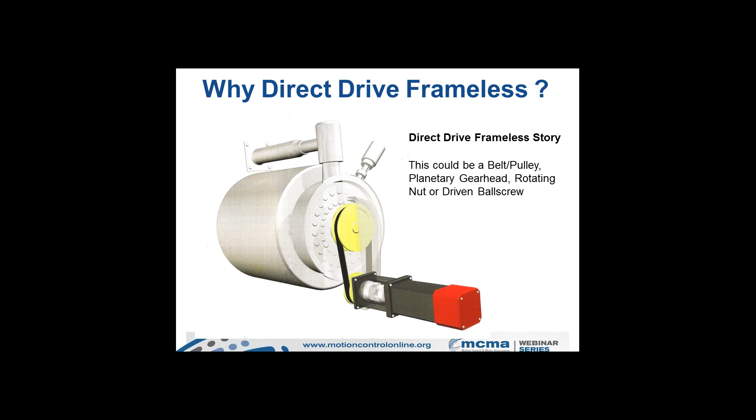Basically, the direct drive frameless motor story can be summarized in two simple slides. We have regular servo applications that use either belt pulleys, planetary gear heads, or rotating nut and driven ball screw systems, all driven by servo motors that in some manner link to a mechanism, a machine, some kind of automation. Very simply put, what we're trying to do is replace the electromechanical systems with as few components as possible, using a direct drive capability, as you can see in this oversimplified view.

Let's take a look at a few simple points on why go to direct drive, why pursue frameless motor technology. There's a need to generate clean mechanical assemblies with lower and lower parts count, and reduction of assembly time. We also want to make sure that by taking advantage of frameless motors, we get significant improvements in servo performance, due to reducing lost motion, backlash, and the losses in motion control associated with gear trains and mechanical systems. We can see system accuracies increase up to 50 times.

By having higher servo performance and machine control bandwidth, we can push the bounds of motor architecture and technology. Historically, there's been a need to worry about applying a servo motor due to lost motion and inertia mismatch—that's the load inertia reflected back through the motor inertia. We've always wanted a rule of thumb of 5 or 10 to 1 motor-to-load inertia matching, in order to ensure good, stable servo performance.

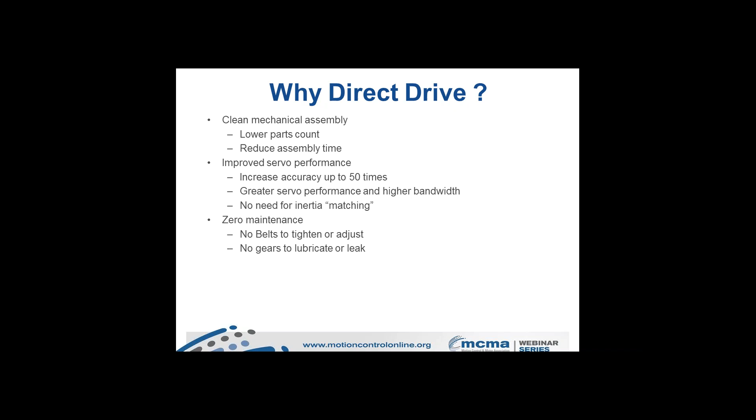By going with direct drive technology and reducing or eliminating all lost motion in the system, and having an extremely stiff system, this is where we get the increase in servo performance. Also, you'll have very little maintenance, typically with no belts, no gearing, no lubrication, no leakage—these are systems that make good, solid sense for going direct drive. Because of the lack of mechanical transmissions and additional parts, there is a significant reduction in machine downtime and improvement there as well.

Another benefit of going with a frameless motor architecture is that we often have the ability to have a through bore through the center of the shaft of the motor. This lets us bring in functionality like process air, dealing with pneumatic systems coming through.

Even hydraulic systems, oftentimes in applications, we see people putting large bore assemblies for slip rings and even microwave antenna systems through the center, often in military and aerospace applications.

The other performance improvement is that we can generally run substantially more quiet. We've seen improvements in noise reduction by up to 20 dBA scale, by getting away from having those typically high-powered, high-performance servos screaming at 4,000 to 8,000 RPM, driving through gear trains that make a lot of extraneous noise, and getting these systems quiet.

In the European model of machine building over the past 15 or 20 years, they were very quick to adapt and develop machines that had frameless motor architectures. In the United States, we were somewhat slower in developing this because we had very large floor spaces on the manufacturing centers, and we weren't as constrained by having physically large machines.

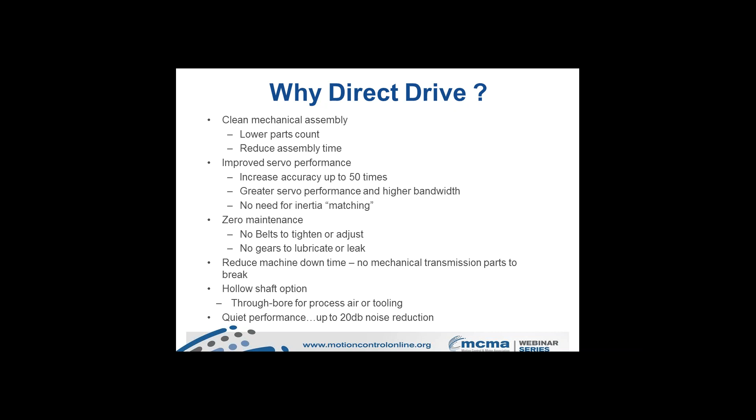The use of lean manufacturing processes in most of modern American manufacturing environments has caused the need to have machines physically get smaller. And as a result, the direct drive nature of motors and designs has been significantly improved.

I want to spend a minute on one particular style of direct drive application that is basically taking a housed, simple, directly driven, frameless style motor onto a 4-foot diameter steel load wheel. This particular load wheel weighed 250 pounds, and there are 96 steel elements near the edge of the radius of this system. This would have been for an application where there's a need to very specifically put a needle into a process point near the radius here.

So we've got a move of 3.75 degrees per peg, and you've got a 15 pound-feet second squared total inertia. The inertia of the load to the motor in this case was over 1,500 to 1 load inertia. You'll notice that the motor has a continuous performance of over 250 foot-pounds.

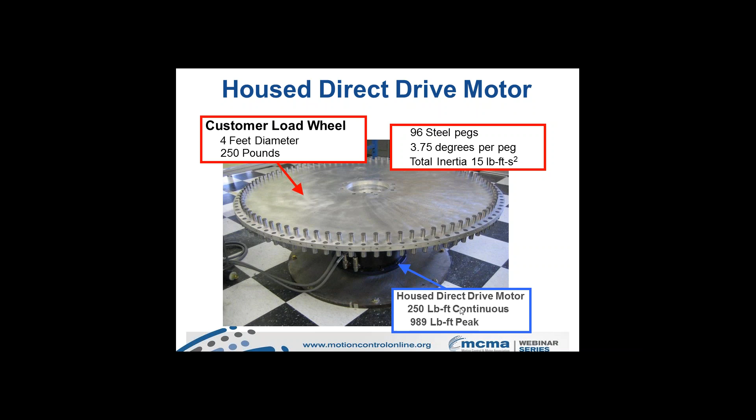Frameless motors are sized anywhere from 1 to 1.5 inches in diameter, all the way up to standard housing systems up to 34 inches in diameter, with continuous and peak load points measured from ounce inches up to measured in tens of thousands of foot-pounds.

If I take a look at the move profile that this particular application was able to accomplish, the nesting of the load points had to be accomplished very quickly, and especially with a high load inertia, trying to get down to a settled move time less than 100 milliseconds.

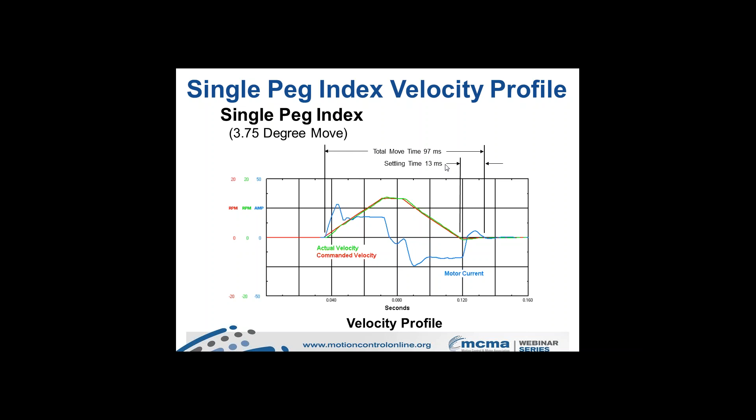So you'll notice here, for example, that we've got a 100 millisecond move time, and that coupled with an application that is driving 100 milliseconds of actual performance, that's 300 cycles per minute for the application for this kind of move.

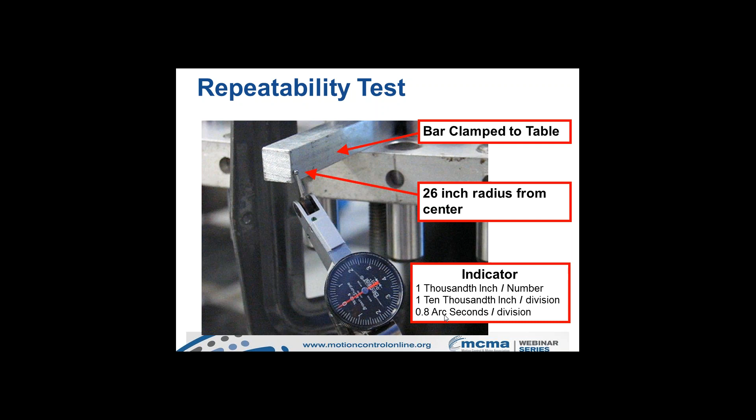I'm going to show a little bit of information here on a repeatability test that we did. I'm going to show a bar clamped to that rotary table at a point 26 inches in the radius from the center. I'm going to put a dial indicator, and the numerals here are going to indicate a thousandth of an inch, and each division will be a 10,000th. That 10,000th of an inch is representative of 8/10 of an arc second per division.

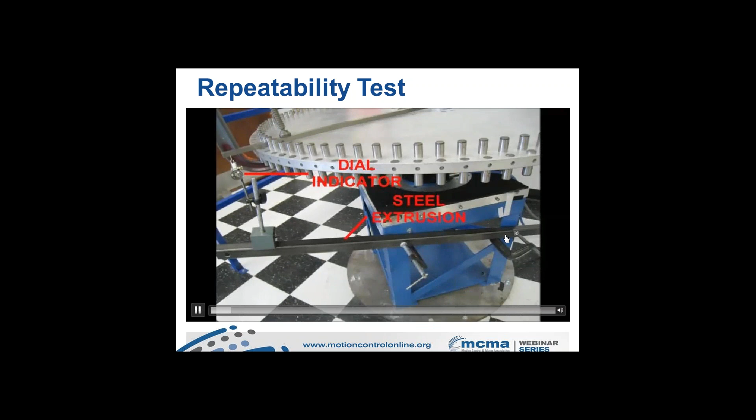The dial indicator you see here on the system is mounted to a steel extrusion bar, and we'll then go through a process of zeroing it out. You'll notice here that it's 1, 2, and 3 thousandths of an inch by the large numeric indicators. Each division is 1 ten-thousandth of an inch.

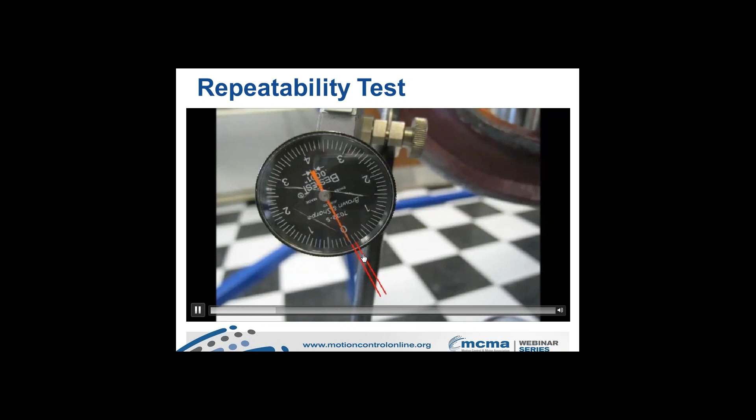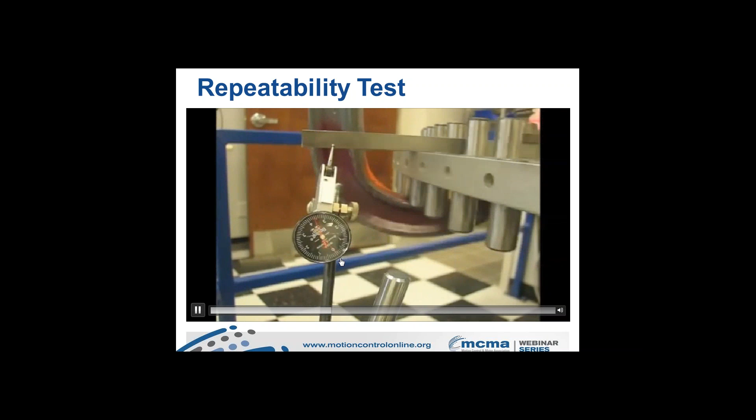Let's take a look now as we command the motor to draw back and forth to move away from the zero position. Moving away from the zero position clearly takes it off the dial indicator and will return. Now we're going to show the variance of well less than 1/10,000th of an inch, or better than 8/10 of an arc second of repeatability. Keep in mind this is done at a radius of 26 inches from the center.

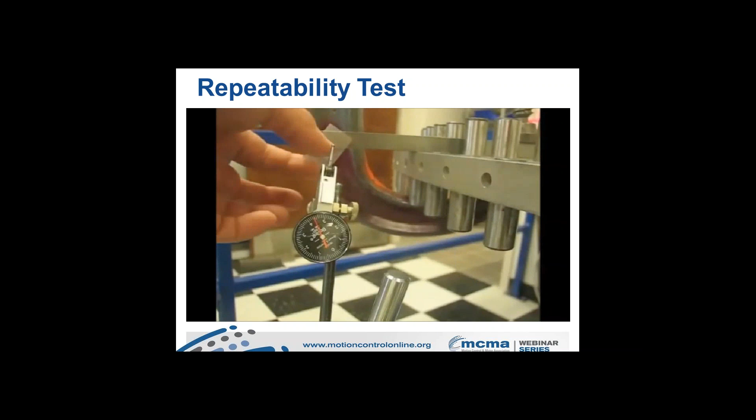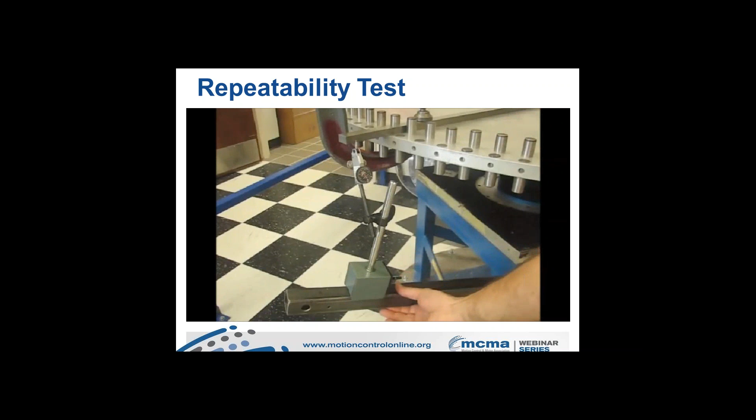We're going to move the motor away for a moment and put a piece of Scotch tape on it. As we bring it back into position, you'll see that the tape's thickness is on the order of 1.6 to 1.7 thousandths of an inch. As we back off and remove the tape, it returns to that same zero location. If we push on the load wheel, we only see about 1 thousandth of deflection, but if we push on the extrusion, we see as much as 3 thousandths. This shows the servo loop has substantially higher stiffness than the steel extrusion itself.

This kind of system has extremely high bandwidth and extremely high servo performance. Right now we're commanding moves of 1/10,000th of an inch, and when a hand rests on the load wheel, you can't even feel the physical movement of the system. This shows the capability of high performance, direct drive systems, and typifies the extreme positioning capability within these kinds of systems.

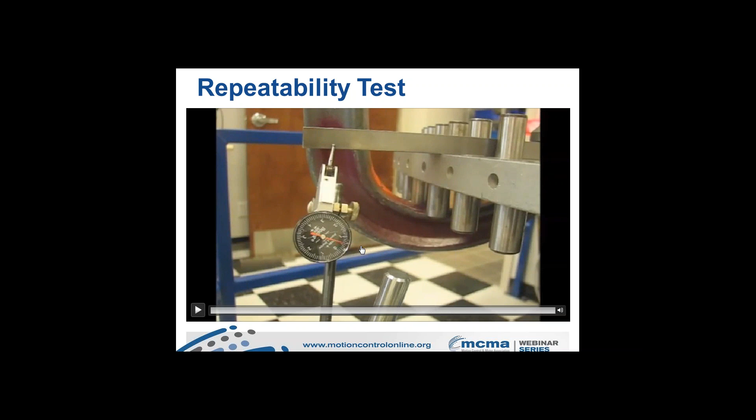Various kinds of frameless motors range from small diameter, longer, skinnier form factors more like traditional servos, which might have speeds up to 15 to 20,000 RPM in some spindle applications, to frameless motors in a form factor more like a pancake style system. These motors vary in performance, and basically most any kind of servo motor can be adapted and developed into a frameless motor architecture.

We'll go through several different application types. One of the most popular and highly visible applications you see on factory floors today is the use of collaborative robots. These collaborative robot designs use frameless motors integrated into each of the joints, so you'll see waist, hip, shoulder, wrist, and often distal joints run with small frameless motor applications. These motors are embedded in machines that, in the sizes we're seeing here, can rapidly and accurately position 5 or 10 kilogram loads.

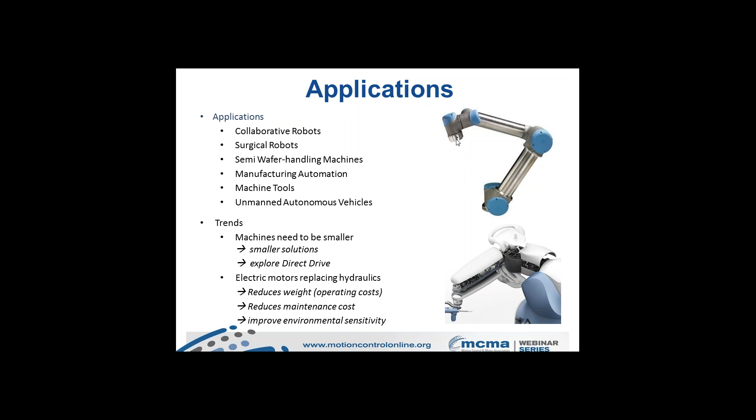Similar kinds of robots are used in surgical robotic procedures—again the same kind of applications, sometimes using direct drive, sometimes driving small gearing systems that allow for very high ratio and yet higher speeds of the system. The outcome is still a highly stable end-of-arm effector, whether dealing with cutting elements or positioning relative to industrial automation requirements.

Very often we'll see special purpose motors, in some cases in semiconductor wafer handling machines. Sometimes we have to adapt these motors into special environments, including vacuum rating, typically seeing applications in excess of 10 to the minus 6 or 10 to the minus 7 torr. We'll also see applications where these motors need to be space rated or have radiation hardening characteristics. Very often in those applications, we use a recipe that allows us to get rid of certain polymers—getting rid of cross-linked polymers that can add problems to long-term life and sustainability in motion applications that don't take those into account.

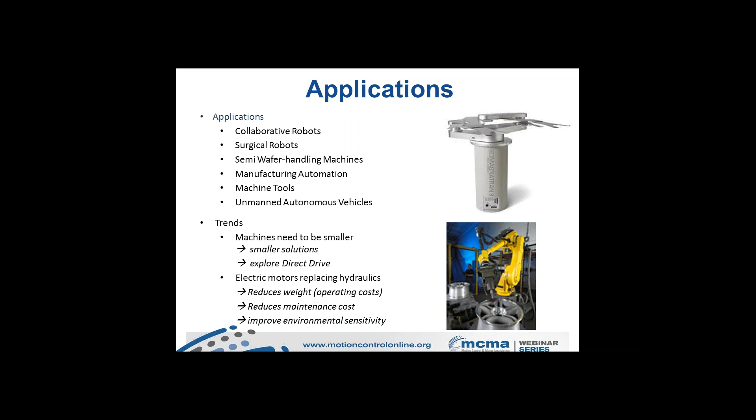We'll also see use in manufacturing automation, and it isn't just end-of-arm tools like the example image here. There's also general conventional machine development where we use direct drive motors—everything from replacing belt and pulley systems, replacing motors driving ball screw actuators, to simple replacement of conventional planetary and spur gearboxes driving systems. The trend is that these machines generally want to be smaller and smaller.

We also see in the machine tool environment where people are adding additional axes of high precision automation. In cases like gear cutting and hobbing applications, or other specific machine tool processes, the use of extremely high bandwidth, very precisely controlled motion allows tool holders to work relative to machine tools.

Oftentimes applications are asked to go into somewhat unusual environments. Back in the 80s, we employed these kinds of motors when working with Woods Hole, involved in developing thrusters and actuators for deep sea work. These motors are sometimes oil-filled and pressure compensated to allow them to go into regimes 2 miles below the surface of the earth, into downhole oil and gas applications, or perhaps 4,000 meters below the surface of the water, again with 20 to 30,000 pounds per square inch of pressure that the motors might see.

The extreme environments even extend all the way into space, where we have applications—we've been on multiple Mars rover programs.

We've been on the upper torso humanoid robot on the space station.

Your applications may not be as extreme as these kinds of applications, but the capability to adapt frameless motor architectures and technology to the application should be quite sound.

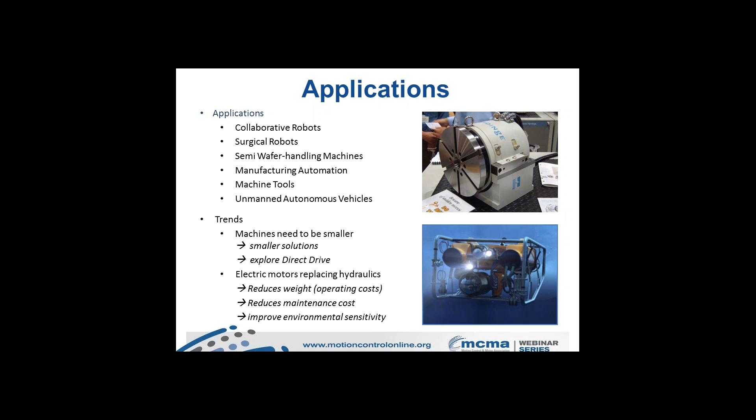We were approached a few years ago by the National Robotics Engineering Center in Pittsburgh, part of the Carnegie Mellon Group, and they asked us to help develop motors that would be extremely torque and power dense for an application. The Fukushima nuclear disaster led to an understanding that we had to have robotics capability to go into environments not able to be served by humans due to the extreme nature of radiation or perhaps temperature, other problematic elements.

So Kollmorgen, within a relatively short period of time, worked to develop 4 separate motor packages that the NREC team integrated into a solution that included a high-ratio gearbox, a torque tube transmission system through the design, a high-resolution feedback device, and a braking system that allowed for over 50 degrees of freedom on the so-called CHIMP robot that was in the top 3 of the DARPA Robotics Challenge.

This was the only robot that was completely designed and developed within the 18-month time frame of the initial DARPA challenge. We had over 40 axes on this, all developed using these same 4 building blocks.

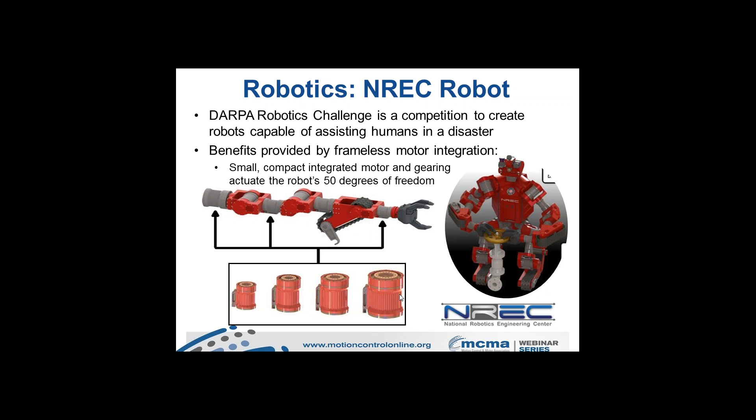The idea of closely integrating frameless motors into gear, transmission, feedback, and brake systems is exactly what a significant number of our customers do for their own automation and robotic applications.

I'm going to take a moment and show a very basic mounting video. This shows the manufacturing simplicity of assembling a system that has a package. In this case, we have a company that uses a liquid cooling jacket on the assembly, and you can see the motor wiring and a porting here for allowing the cooling.

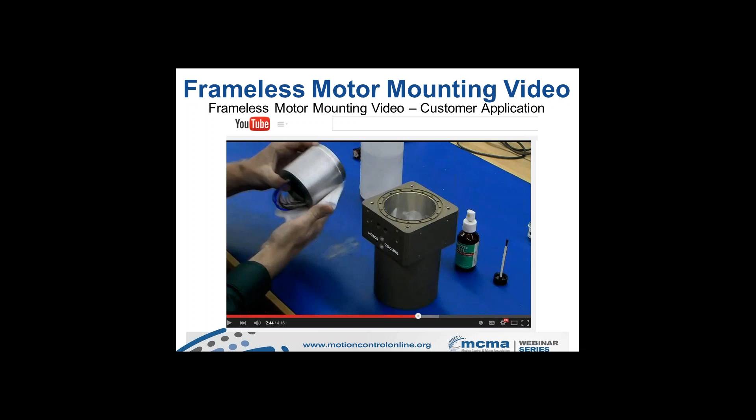Because this is being used at the end of a robotic arm, they needed a very high performance motor. In this case, these motors spin up to 15,000 RPM, and that particular motor you see in hand is up to 8 horsepower peak and 5 horsepower continuous in the application.

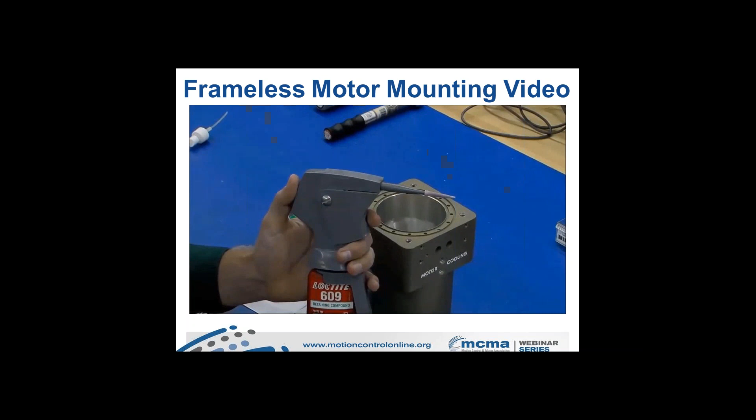So let's take a look at the mounting practices here. The stator assembly shown here is going to be bonded into the housing, and they scarf it using 80 grit sandpaper—a method to make long grooves. After cleaning and priming the system, one of several potential industrial adhesives, in this case a 609 Loctite, is applied inside and outside the stator sleeve. The stator is inserted into the housing and rotated to distribute the compound evenly into its final location.

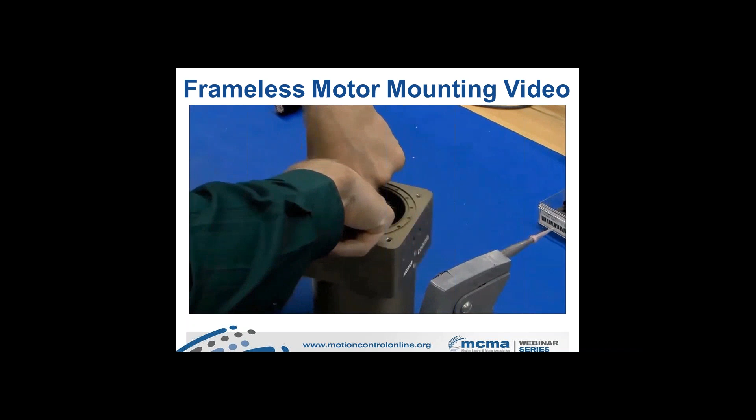In this example, the point where the stator leads will exit the housing—when done vertically, the hydrodynamics of the adhesive will naturally center the stator inside that housing assembly.

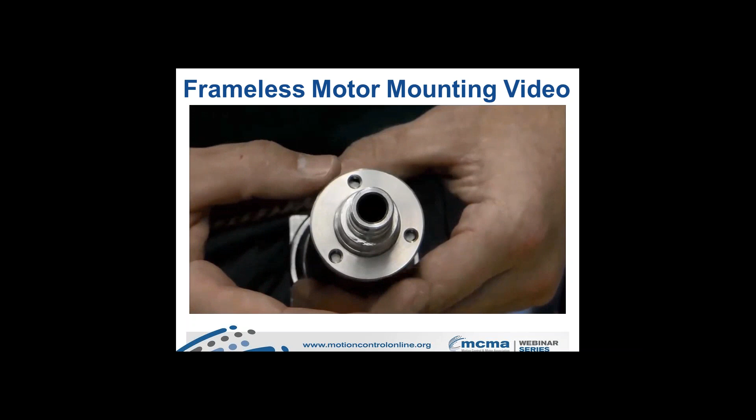The rotor is going to be clamped onto the shaft using a locking ring assembly. The shaft has been machined using standard machine tolerances. The bearings are then added to the shaft, and the assembly is pushed together. The shaft is then balanced. Because this one's up to 15,000 RPM, typically balancing is recommended for shaft speeds in excess of maybe 4,000 or 5,000 RPM. The completed assembly is pressed into the housing—relatively low magnetic forces here due to the relatively small motor size—and now the motor is ready for its final testing.

It's a bit of an oversimplification, but it is very straightforward and meant to show that the process of integrating a frameless motor into a fairly conventional industrial automation system is very practical, simple, and even in a relatively fistful-sized motor, does not have magnetic forces that would preclude the typical manufacturing company from becoming, in effect, a motor builder.

Let's talk a little bit about motor form factors in frameless applications. There are basically two types of frameless motors. The classic torquer motor shape, or pancake-style shape, is exactly what it looks like — relatively thin in cross-sectional profile and perhaps a little larger in diameter. A servo motor style shape would take on a longer, skinnier form factor.

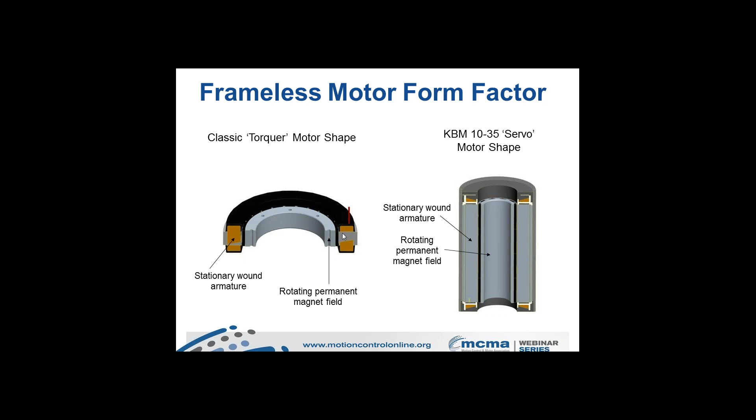Typically, a much smaller through bore is available and a lower pole count to the system, which is also indicative of the relatively higher speed these kinds of servo motor shape frameless motors might involve. In both cases, the outer portion of the motor is typically non-rotating, called an armature or stator assembly. The internal rotating element is typically a permanent field device, called a field or rotor assembly. The same is true of either style machine you see here.

An interesting rule of physics comes into play when adapting frameless motors into machine designs. We call it the D squared L rule. Quite simply, if you double the length axially of a motor, you'll have an increase in continuous torque and typically power that's roughly proportional to that increase in length. So double the length, double the continuous torque.

But if instead of doubling the length, you were to double the diameter, you don't just double the potential for increase — it's a squared function of that increase. In this case, your continuous torque would be 2 to the second power, or squared. You would have 4 times the continuous torque capacity by simply going to the larger diameter.

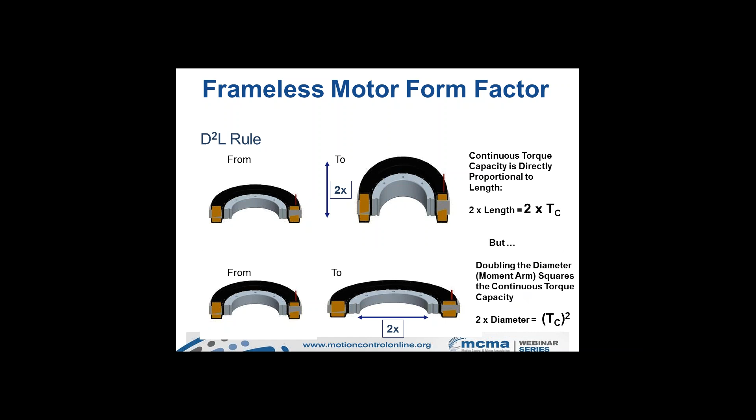This is why, when you pick a motor in a frameless motor application with a form factor to deal with, you generally want to try and maximize the diameter — that will shorten the stack length and give you the best effect of performance improvement. So, largest practical diameter is very often the way to start initiating the application.

Obviously, you've got to take into account torque and speed load points, duty cycle, and temperature details, and understand what limitations you may have from the amplifier — whether it's certain bus voltage or current levels available from the amplifier of choice. The mechanical envelope you've got will clearly define the maximum diameter, maximum length, and through bore requirements based on elements in your process, as well as the type of mounting — whether you'll have a permanently mounted rotor and stator, or a system that allows removal for maintenance or other process control applications.

Those stack length changes will give you appropriate increases in wattage. We're also able to optimize the winding parameters based on exactly the current and voltage available for the drive and the application. These choices vary from groups of pre-engineered standards, which are fastest available, all the way down to custom systems where we want to highly optimize the package.

In some cases, to push performance improvements, we use liquid cooling in an application, and you'll find that we can build these systems. Either we can have half-shell cooling systems, or more often customers will simply develop their own housing, as you saw in the video a few moments ago.

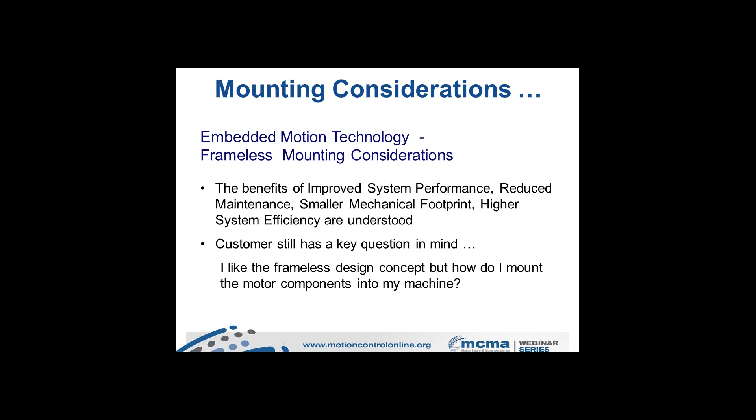There's still a lingering concern about how to put these things together and mount these components into your machine. As a machine designer, you understand the dynamics of how your shaft has to operate, the dynamics of rotating that shaft and the bearing considerations, and the machine tolerancing and precision of the elements in the mechanism. Your shaft, drivetrain, and bearing system are more important than the mounting requirements for the individual components of the frameless motor.

Consider the runout on your machine: say you have a rotating piece of equipment with a shaft rotating at a couple thousand RPM. Your typical design is going to be somewhere within 2 or 3 thousandths of total indicated runout, or TIR. If you're greater than that, when the machine runs at speed, it's going to dance across the floor. You don't want inherent inefficiency or balance issues, so you build your machine with tolerances that hold you inside that 2 thousandths TIR.

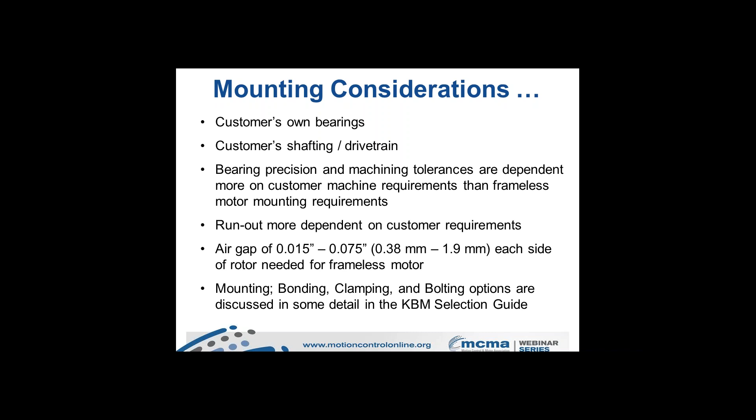To give an idea, the air gap needed on our frameless motors—the radial running clearance, the OD of the rotor compared to the ID of the stator on both sides—our 2-inch motor has 15 thousandths of an inch of air gap. Although you'd like to be as practically centered as possible, if you're maintaining a couple thousandths of TIR, your manufacturing and machining tolerances will be well within what's required for building and integrating a frameless motor into your project.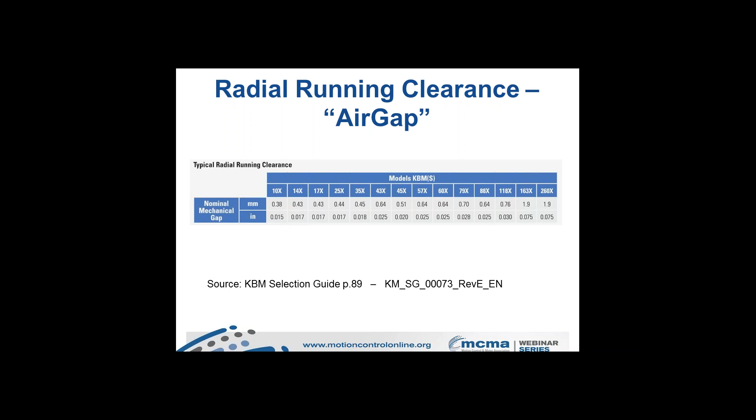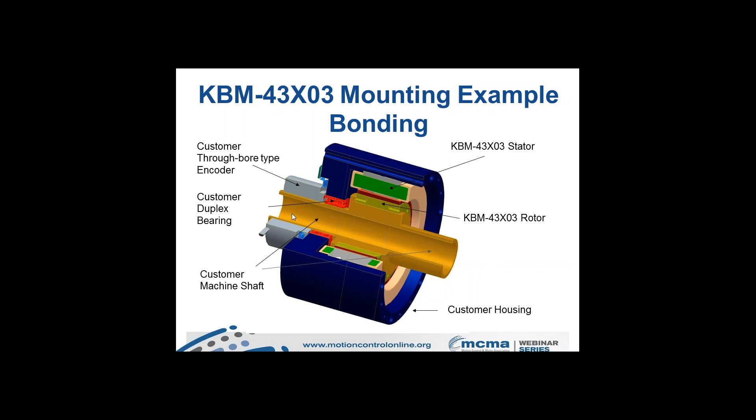Let's do a quick analysis on a CAD view of how a mounting example might be handled. I'm looking at half a system, since I only have one set of bearings here—a housing element in blue containing the motor and shaft bearing for one half of the system, including a through-bore encoder. Let's blow this apart and pull out the shafts and rotor, then further pull out the stator and pull the rotor off the shaft component.

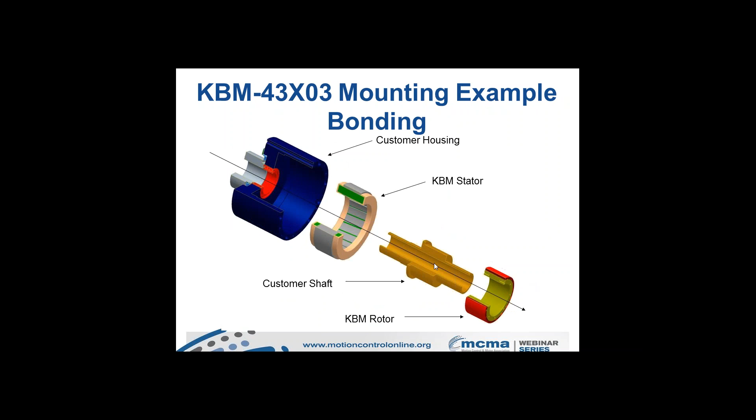Let's dive in deeper and look at an example of using industrial adhesive or bonding. Using today's high-performance bonding and industrial adhesives is often found to be the most practical way to manufacture these kinds of systems. Let's take a look.

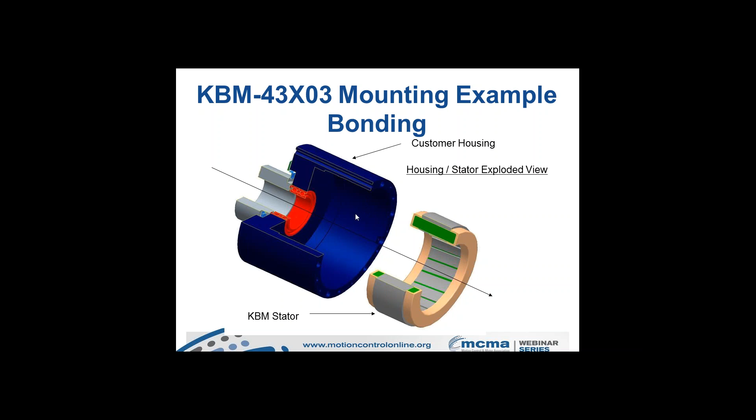I'm going to go from a 3D to a 2D to a detailed black and white view and get into some specifics. In this mounting example, mounting a frameless motor stator—the electromagnets and larger diameter piece—you'll notice machined-in depth stop features and machining that allows for a slip fit. This allows for ease of manufacturing and handling, so you're not having to deal with things like shrink fitting.

Or having to deal with heating or cooling elements to assemble these pieces together. In fact, you'll notice there are a couple of channels that we have recommendations for, allowing additional adhesive to be maintained inside this groove, typically as much as 50% of the surface area here.

You'll notice that depth stop feature would allow for making for minimum end-turn housing clearance. This would be important, especially when you're trying to maintain the integrity of the creepage and clearance limitations to make sure your mechanism will be within general practices and best practices for CE, UL, CSA kind of capability.

We will be able to provide you with files that show our motor elements are designed with compliance to these standards, and that you, using best practices, will be able to further have your system's compliance as well. We make some specific recommendations for structural epoxy, some of which are ambient set and take a longer time to set.

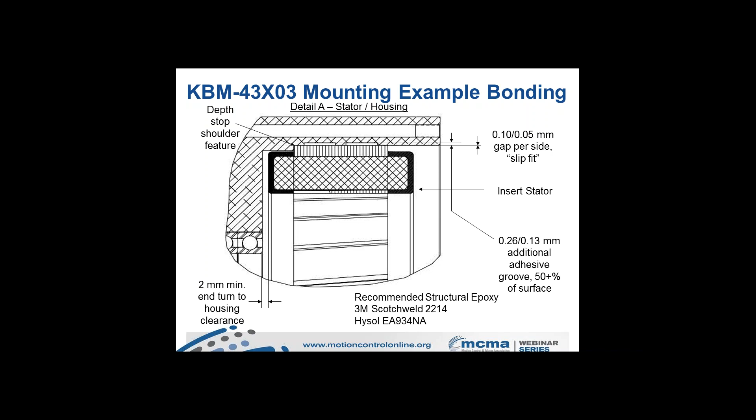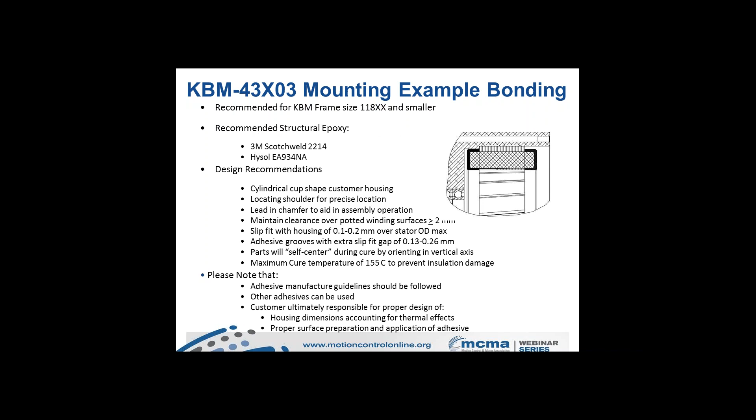Some are actually temperature or thermal set and are typically done overnight in an industrial oven, ready to go and cooled by the time the next morning shift starts. This kind of detail is also available in the selection guide documents and mounting practices guides that we've got online. This is something you'll be able to review on the MCMA website over the next year as well.

For dealing with bonding the rotor to the shaft, we typically see that something as simple as a retaining compound, like a Loctite 640, would be appropriate. Here we do recommend a precise location slip fit or a bit tighter tolerancing on the parts, but again this is well within the typical manufacturing means of applications and machine developments that our customers see.

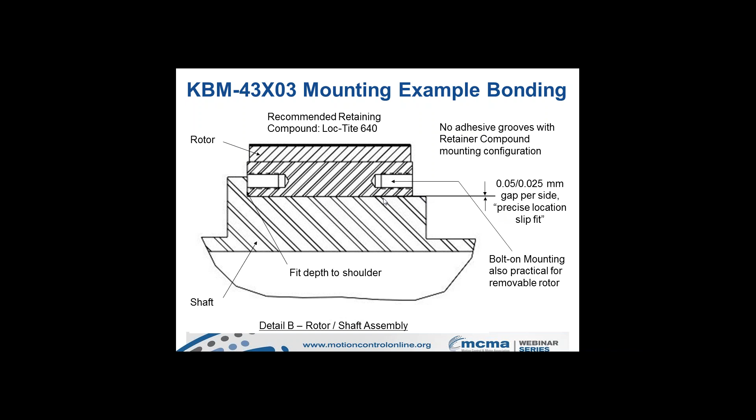You can, of course, deal with bolt-on configurations if you need a more removable style system. So bonding with structural adhesives is really key, and it's dependent more on the customer machine requirements than on the frameless motor mounting requirements.

They're very cost effective. In fact, the structural adhesive has a further benefit of being able to stand a wide dynamic thermal range. If your application might be cold at one moment and then with the motor executing get very warm, it turns out that through many thousands of cycles, the bond line of the industrial adhesives actually creates a stronger and better joint than the potential over a similar wide temperature range that you might see in a shrink fit style application.

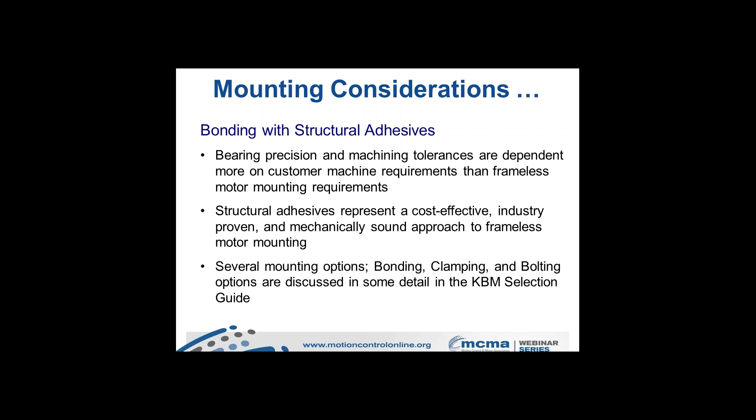So again, we actually recommend the use of structural adhesives all the way up to our largest motors, which are only recommended for use with clamping or bolting. All that information is available with typical frameless motor manufacturers in their selection guides or mounting guidelines.

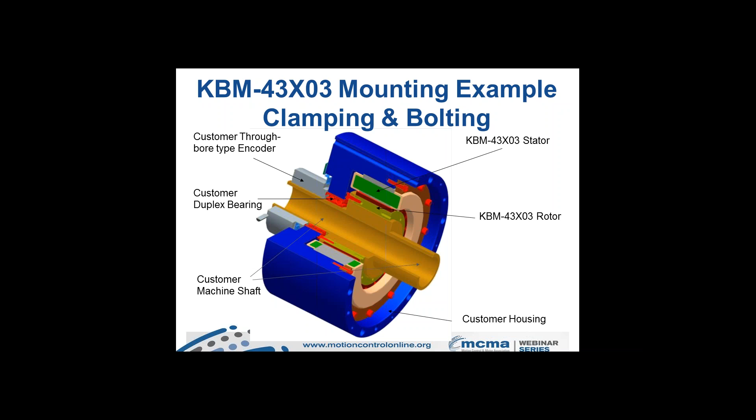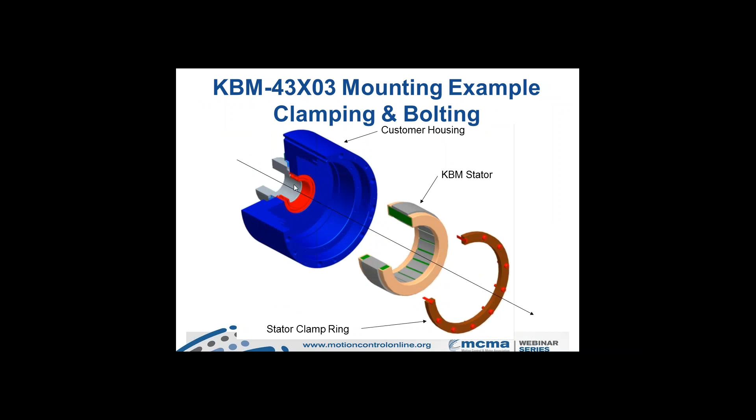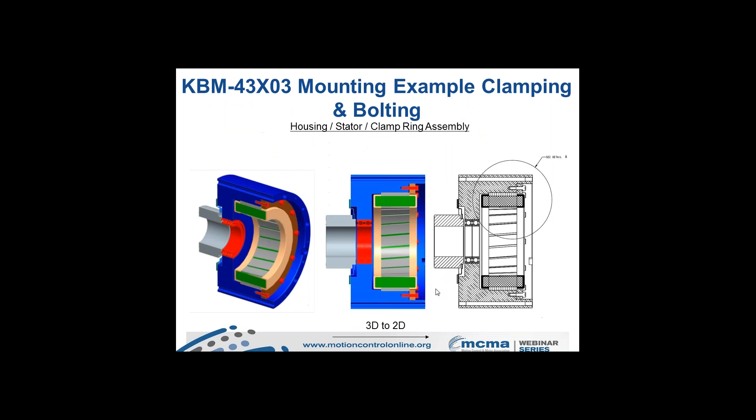Let's take a quick look at the clamping and bolting example here. You'll see that we blow apart the application, showing again the bearing and the feedback device on one side of the housing. The clamp ring you see here shows a different number of clamp ring bolts that are evenly spaced around. Let's go from 3D to 2D and down to a detail view.

Here, just making sure that the gap behind the clamp ring ensures you've got allowable compression. Same kind of depth stop feature and end-turn dimensioning. Very simple. Again, we've got a precise location slip fit, and the clamp ring has got to engage a significant portion of that stator shoulder here to be effective.

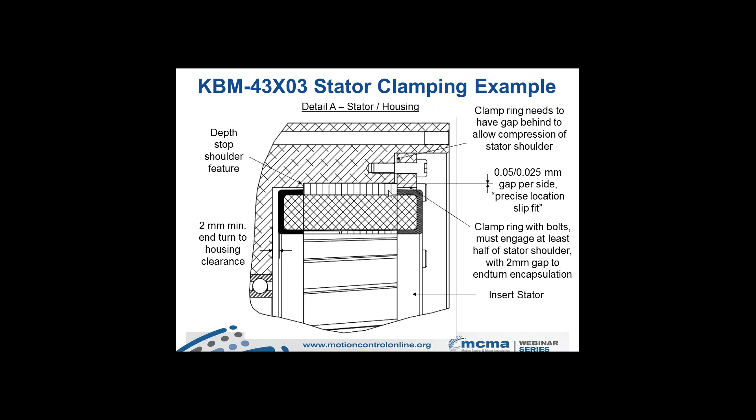You'll find that similar details are identified here, so you'll be able to review this at a later date as well. In clamping and bolting, again, very straightforward.

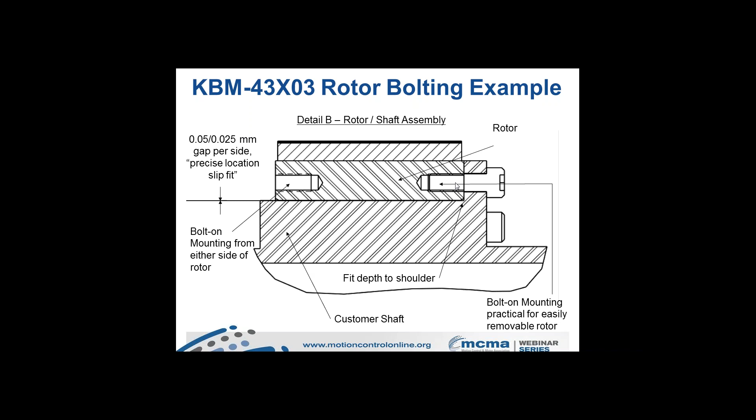We have the ability to not only vary the ID of virtually all of our frameless motor rotor applications, but also can provide specific bolt-on or in some cases through-bolt hole configurations for mounting the rotor. Very straightforward, and the performance of these systems is not going to be hindered by your ability to manufacture these in the application.

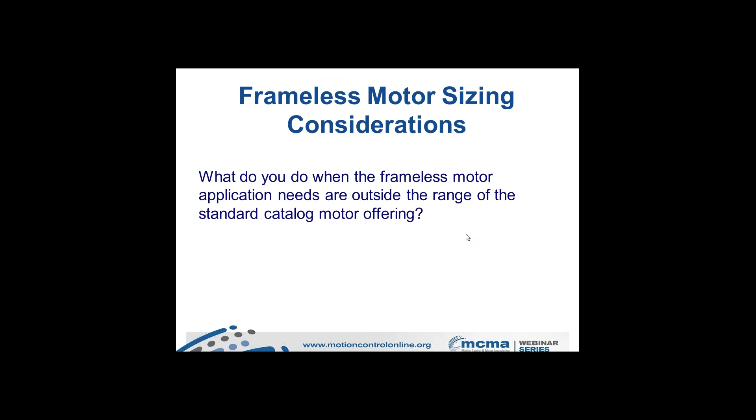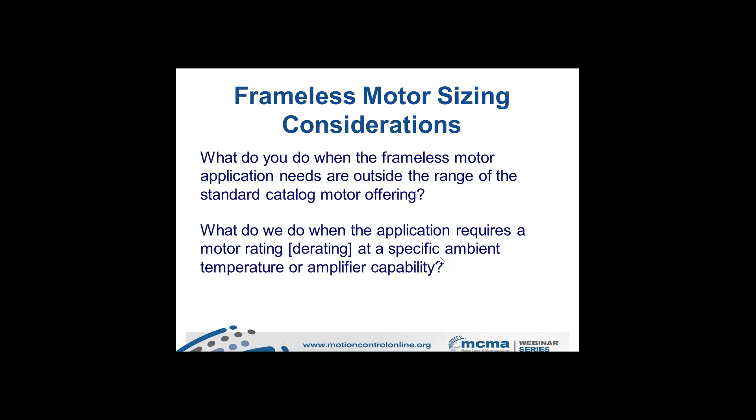Sometimes we do go outside of standard catalog motor offerings. What happens if we've got a thermal limitation and we've got to look at a specific ambient temperature or an amplifier capability? It turns out that one of the things we can do is provide you the ability to look at a performance curve generated by the actual application requirements that you've got on your system.

What I'm going to do here is pull in a live view.

This is on the Kollmorgen Developer Network website, and we're going to be turning this on live for all of our customers to be able to use.

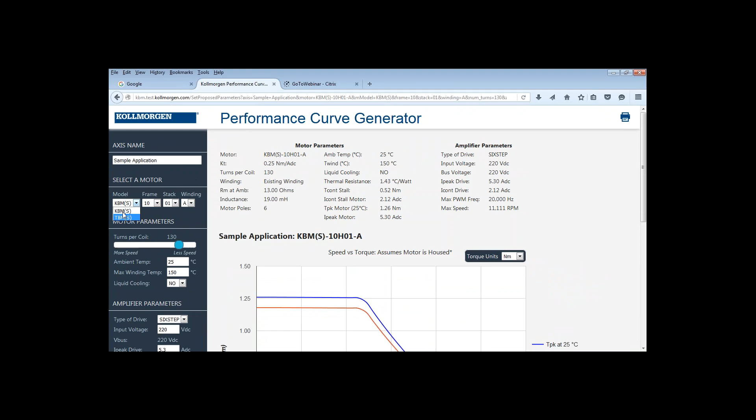We're going to have two different families of our conventional servo and torquer motor, frameless motors available, be able to pick frame sizes, stack lengths, and standard windings, and to show, based on a given ambient temperature condition, allowing you to set a maximum winding temperature.

You may want to only have your winding temperature get to a point of, let's say, 100 degrees C, as opposed to a maximum of 150 that's allowable.

We would also have the ability to show what the system would look like with liquid cooling, and give you some indication of the amount of watts you'd have to dissipate to improve the continuous performance of the system.

By dealing with liquid cooling in an application, you do not increase the peak torque capacity of a motor, but you do generally see an improvement from 50 to 80% of the continuous torque capacity of the system.

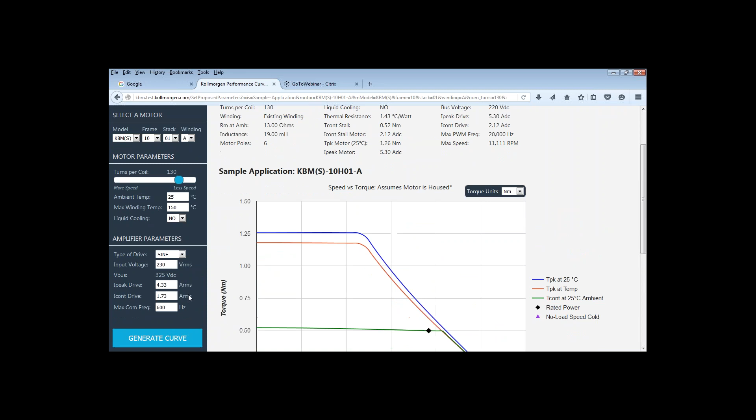The other thing we'll be able to deal with is to look at variations in the input voltage. Whether you're dealing with a sine wave style input and you've got, let's say, 230 volts AC coming in, that's going to create a 325 volt DC bus. Right now we're simply showing what the motor performance is here.

If my amplifier only had a 1 amp capability here on the system, you would notice that the continuous torque is limited now by the continuous rating of the drive. It produces a curve that shows a similar kind of peak torque, but now a reduced continuous torque simply as a result of the drive limitation.

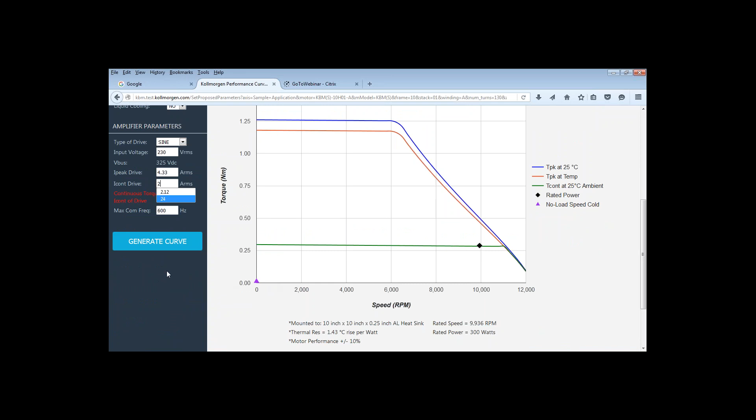So if you were to back up and had a 2 amp drive limit, you would see this live as well, going back up to just the 1.73 amp that the motor would allow it to run at, which is what you see up here.

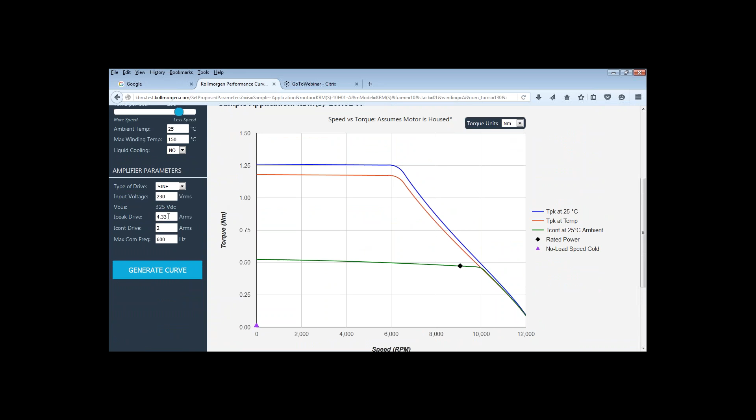So these kinds of variations, this kind of tool, allow you to optimize the performance of your system based on input voltage, based on actual amplifier peak and continuous current capability, based on liquid cooling versus not liquid cooling—you'll see this improvement is fairly substantial.

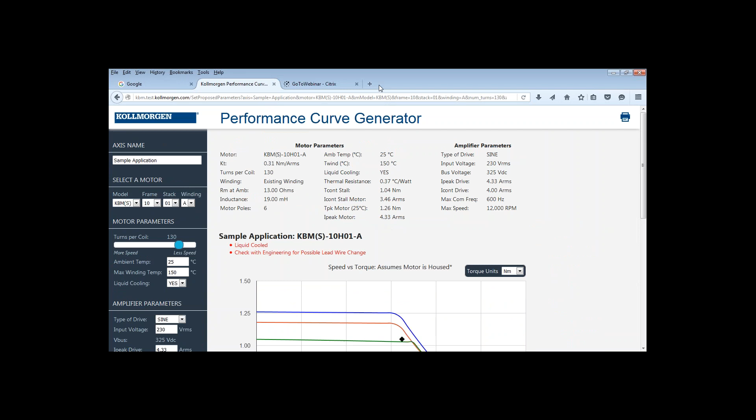As a result, these kinds of tools give us an ability to generate optimized performance. I expect we're going to have this online within a month.

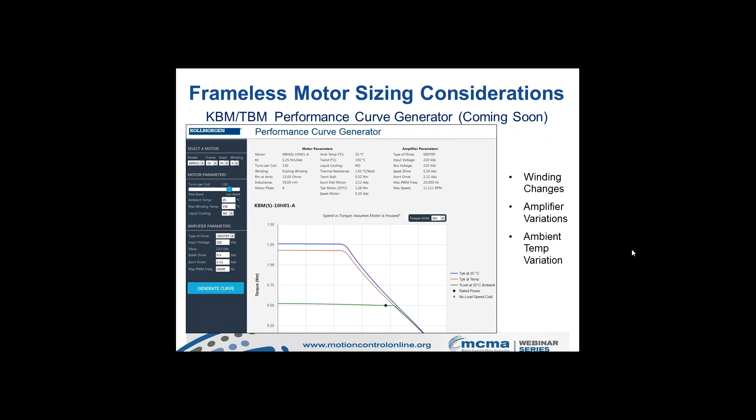Not only will you be able to put the inputs in for the mechanical assemblies you'll be developing, but you'll also be able to program into the analysis the specific move times, speeds you want to achieve, the rates of performance, and the duty cycle, and this will help generate motion profiles that will hopefully make a difference for you.

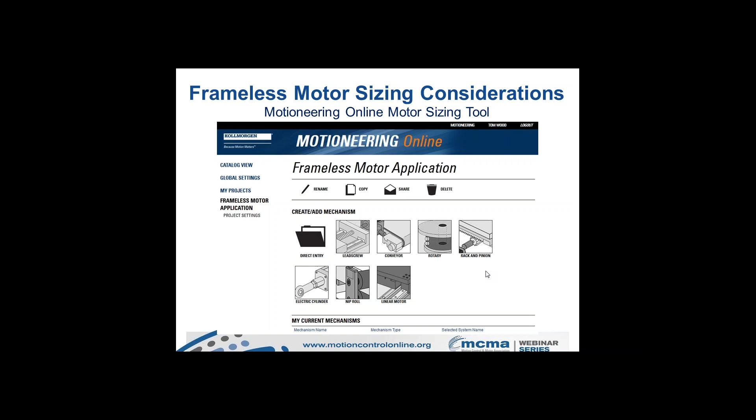Well, it turns out that I've taken 45 minutes of time here. I certainly appreciate the opportunity to have gotten together. Joanna, were there any other questions you wanted me to work on?

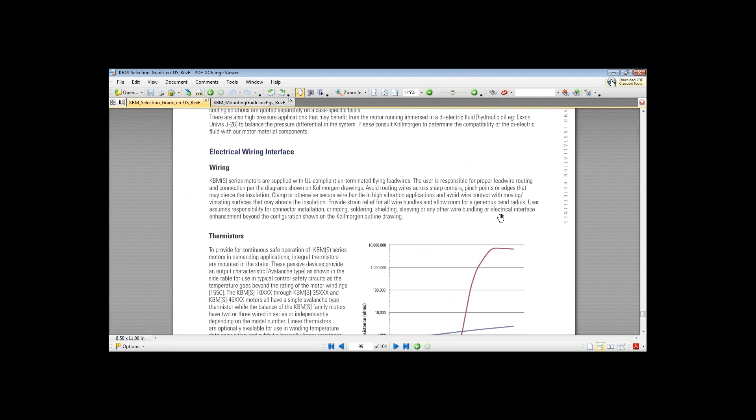One of the key things to involve is that we have the ability to deal with taking applications to high temperature, because the motors can stand it, but sometimes the processes themselves can't stand it. So we can actually embed in the system thermistors so that during development we can see exactly what the actual temperature at the application is.

With either an avalanche style thermistor device that might be used to self-protect the application or the drive, we don't get really good technical information on what's actually going on. But we have an option for linear thermistors that give us the ability to monitor the actual temperature of what the motor is producing. This allows you to limit the performance of a motor to maintain a temperature within a certain dynamic range. This might be important for manufacturing processes that are thermally sensitive, or in medical applications where you don't want a housing on a machine design to be too hot with proximity to, let's say, a surgeon or a patient.

So by understanding through the prototyping phase exactly what those thermal levels are like, we can appropriately size the motor, getting enough thermal mass and performance in the motor itself to make sure we don't have too high a temperature limitation in the design.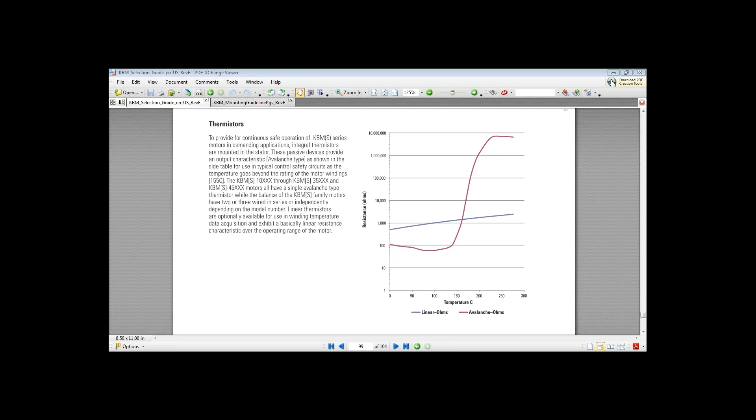I'm reading some of the questions here, Joanna, so I'm going to take another one. On the magnetic field - the motor obviously has a strong magnetic field, does that have any problems with influencing things nearby? In fact, one of the things you're going to find is that installation of frameless motors is probably the point at which you see the influence of the magnetic field strength to be the most significant.

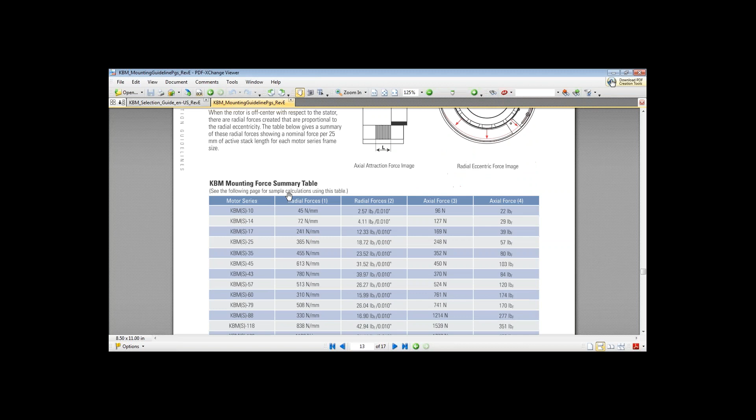In our mounting guide papers, there is an actual table that shows mounting force summaries for both radial and axial forces that can be expected when you see the proximity of the rotor and stator coming together. In some applications the forces are minimal - with our 2-inch motor, the axial attraction force you'll see when assembling those motors, per inch of rotor stack, is only about 20 pounds at worst case.

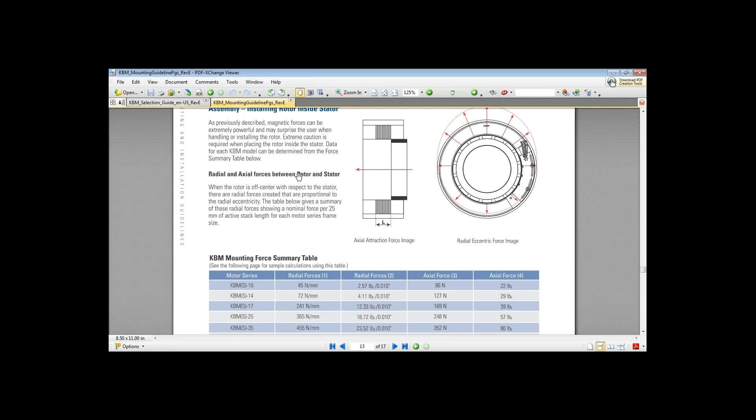That being said, take a look at the numbers with some of our largest motors. That 34-inch diameter motor with a multi-inch stack length can see thousands of pounds of attraction force, and the need for jigs, fixtures, and tooling to allow for careful installation of these kinds of systems is very, very practical. These are the kinds of analysis elements we help our customers with ahead of time to make sure they stay out of trouble in terms of manufacturing processes.

I think we've run down on time here now, but Joanna, any other comments or questions?